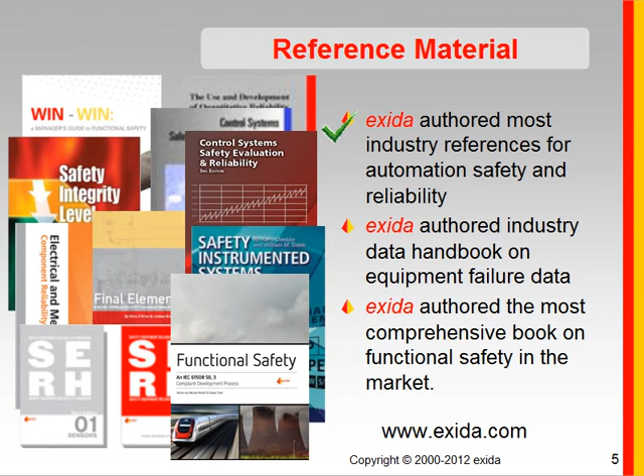At Exida, our procedures, our methods, and our data are all published in publicly available books. We supply these books to our customers, to our competitors, and to anyone who wants them, because everything we do we try to make public. I'm pleased to say Exida has authored most of the industry references ever published on automation, safety, and reliability.

The primary objective in IEC 61508 certification is a demonstration of high design quality, both for hardware, software, mechanical, and high manufacturing quality. Now, when you think about it, it's a whole lot different than ISO 9001, because in all my experience with ISO 9001, you primarily focus on the manufacturing, procurement, and delivery process. 61508 is very focused on the design process, and we spend a lot of time focusing on how well a product is designed.

Why? We want to make sure we have sufficient protection against latent design flaws that could have a very significant impact on safety and availability.

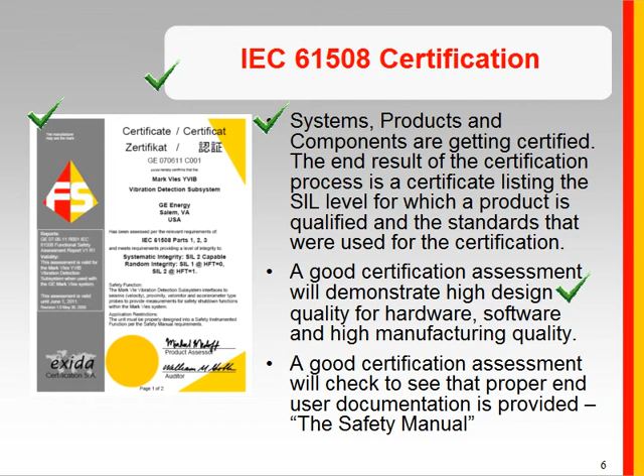There are several companies in the world that have been accredited to provide IEC 61508 type product certification. All product certification programs are typically run under a set of two standards, ISO IEC 17025 for a test laboratory, and EN 45011, which is IEC Guide 65, for the requirements for running a product certification program.

Every country in the world, typically, well, most every country in the world, has an appointed accreditation body. Most accreditation bodies are members of the International Federation of Accreditation Bodies, and as such, they compare notes on how this is done. Most accreditation bodies are governmental agencies.

In the United States, the accreditation body for functional safety is ANSI, the American National Standards Institute. ANSI and the American Society of Quality have formed a merger and provide accreditation per IEC 17025 for test bodies. Now, and the bottom line is, any company who wants to be a CB, a certification body, in the United States must be accredited by ANSI in order to do 61508 functional safety certification.

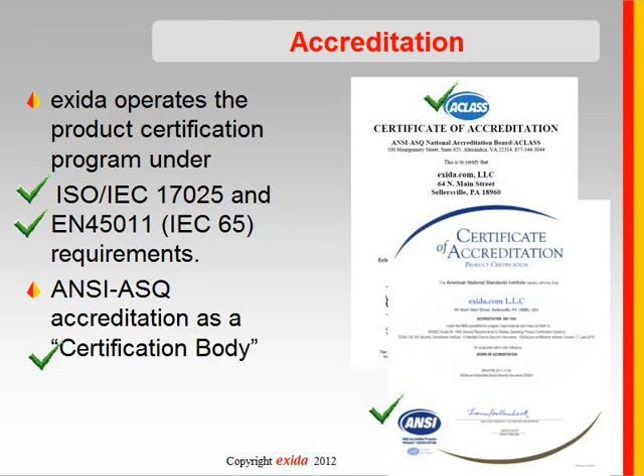Exida has been accredited by ANSI and ACLASS for this kind of work. Now, in fact, Exida strives to operate the most relevant and useful product certification program in the world. And I mean relevant and useful to those who purchase the products that are certified.

In the process industries, Exida does this by having a group of engineers out in the field working on real projects all the time. And the second thing we do is we have established an advisory board. It's a group of approximately 15 end users from around the world. And they review the Exida certification scheme and all the requirements and make suggestions and help us with interpretations and deal with any complaints against the Exida certification program.

It's a very valuable group because over the years they have expressed serious concerns with existing certification programs and have told us that if we ever expect to succeed as a certification body, we need to do a better job. So we listen. Exida has created a functional safety and cybersecurity product certification scheme.

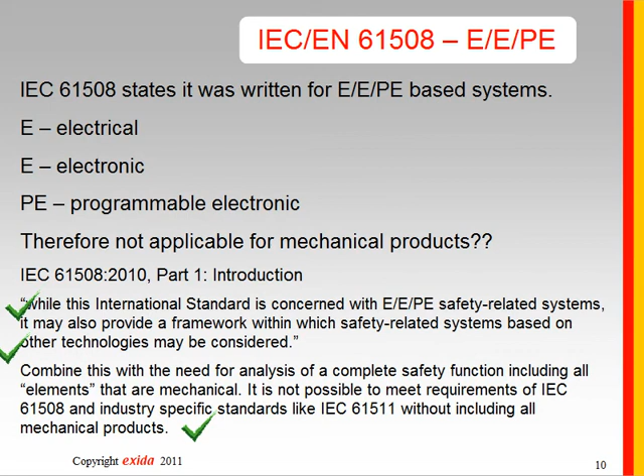So in order to help people do this, Exida does a lot of certifications on all of these kinds of products, including mechanical. For example, a pressure transmitter. How many people even know you could buy a certified pressure transmitter? Well, quite frankly, in the mid-90s, you could not. But today, Yokogawa, Rosemount, and probably a half dozen other manufacturers have been given a SIL 3 capability rating by Exida.

In order to do that, they had to establish or make sure their existing development process meets all the SIL 3 requirements. Why is that? We want protection against systematic failures. They had to add features to the product to ensure protection of the data. Typically, many of them added features to detect CPU execution problems to meet specific requirements of 61508, and all of these things are meant to protect against design mistakes, particularly design mistakes in the software. As an ex-software developer, I tend to choke on that because it's hard sometimes to deal with all these process requirements.

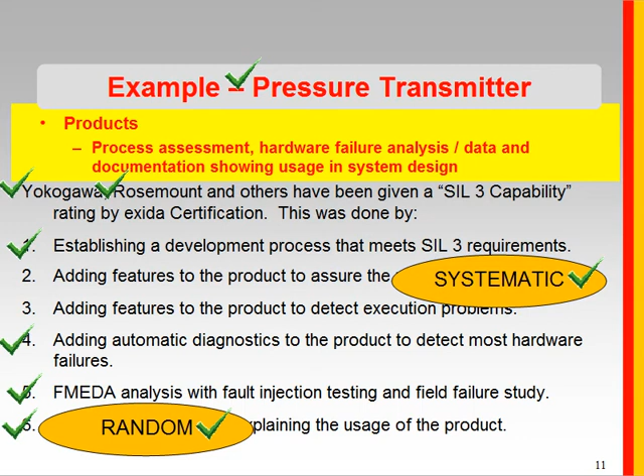Solenoid valves are certified. ASCO, Bifold, Versa, and many other manufacturers have been given a SIL 3 capability rating by Exida certification, and they had to establish a hardware development process that meets SIL 3. Of course, there's not nearly as many requirements if they don't have any software. Demonstrating test results that prove they are following the process. They created a specific user's manual explaining the usage of the product, and FMEDA analysis was done on their particular product design, backed up by a fault injection test and a field failure study to give very accurate failure mode and failure rate data for end users.

Any questions so far? Don't hesitate to ask. Oh, here's one coming in: what does SIL 3 capability mean? All right, that's a good question.

The term systematic capability was defined in the 2010 version of 61508. That term was not in the original first edition. The term systematic capability means that the design, development, test, and documentation processes meet the requirements of a given SIL level. So SIL 3 capability means the design, the development, the documentation, the archive, the review processes meet the SIL 3 requirements of 61508. And SIL 3 capability, as the original term systematic capability means, a product is sufficiently free of design defects to be used in a SIL 3 application. Again, I'll repeat, this is a rather new term defined in the 2010 version of the standard. It is a good question.

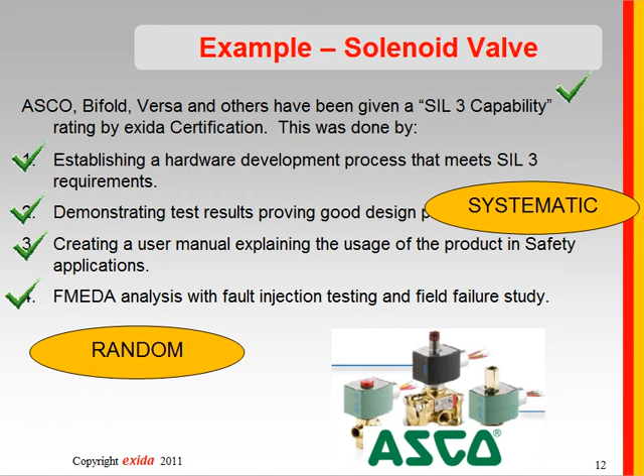Thank you. Again, we want to protect against systematic and random failures.

Even actuators and valves, for example Fisher Controls and many others, have been given a SIL 3 capability rating by establishing a proper development process for that hardware, demonstrating test results, proving they follow the process, doing an FMEDA analysis with fault injection testing and a field failure study, and creating sufficient user documentation to explain the usage of the product.

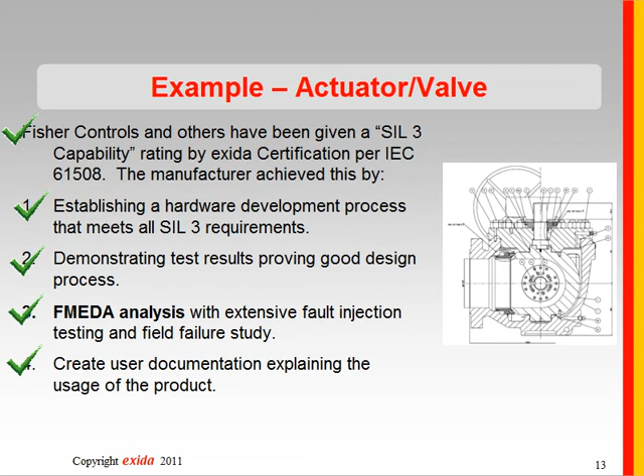Covering both systematic and random failures. Now today, if any of you have not checked, there's a large number of products of many different types that have been 61508 certified. The primary reason for that is that end users must justify all equipment used in safety instrumented function designs, and 61511 gives them two ways to do that. They can do their own prior use justification, or for safety integrity, they can buy products that are 61508 certified. Many end users are going in that direction because they don't want to do the work to do a prior use justification, and they don't want to take any responsibility by signing any prior use justifications.

It's amazing the different kinds of sensors that you can get today. Main primary process sensors: pressure, temperature, flow, level, gas detectors, flame detectors, BMS flame detectors, vacuum. All kinds of products are now available today.

Of course, PLCs, that was the original certification concept. But today I can even get trip amps, isolation modules, intrinsic safety barriers that are all 61508 certified. And certainly on the mechanical end, I can get actuators, solenoid valves, quick exhaust valves, and all kinds of process valves - ball, gate, wedge, butterfly - many different technologies are available in a nice assortment of 61508 certified products. You can take a look at one list, the Safety Automation Equipment list on the exida website.

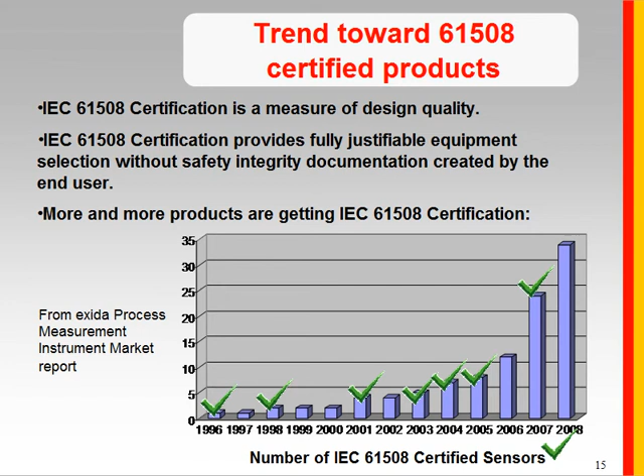If you go to the safety automation equipment list and look at pressure transmitters, you'll see an updated version of this slide, where you can see there were 4 different manufacturers, 5 different products that have been 61508 certified. I can see this slide is a little dated - nice though, today I think there's more like a dozen. I haven't looked for a few weeks.

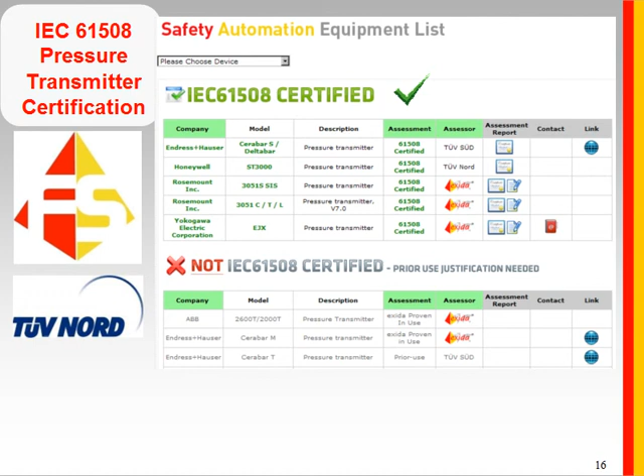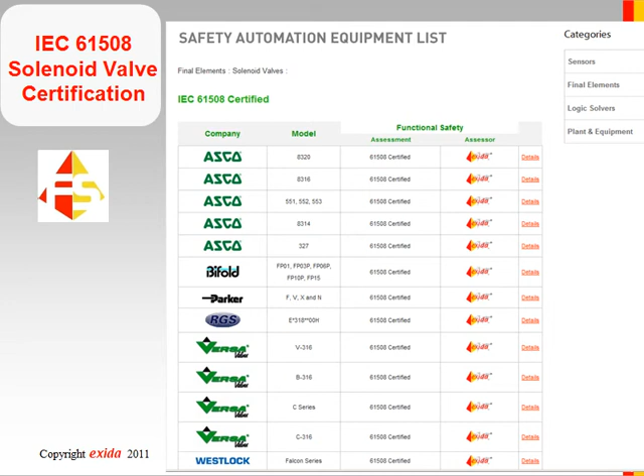You might look at the solenoid valve list and you'll see many different manufacturers, literally over a dozen different choices of families of solenoid valves that have been 61508 safety certified. Same thing for other mechanical products and PLCs. If you look at the PLC list for logic solvers, you'll see not only the functional safety certifications, but the cybersecurity certifications that have been finished as well.

Now, what does this mean for product development? I spent a lot of time talking about the design process and the need for high design quality. The essential requirements are: any product or any group that develops a product - hardware, software, mechanical - needs a documented process for their work. We call it a life cycle, but it just means what are the development procedures and the development processes.

You must have a requirements document. You must have a validation plan where you test in a fully traceable manner that every requirement has been implemented. And you certainly need design documentation, starting with a defined architecture - typically a set of boxes with interactions. Of course, you have to have good design documentation so that people who make changes can make those changes without messing up the safety. You need a qualified set of tools, especially any language compilers.

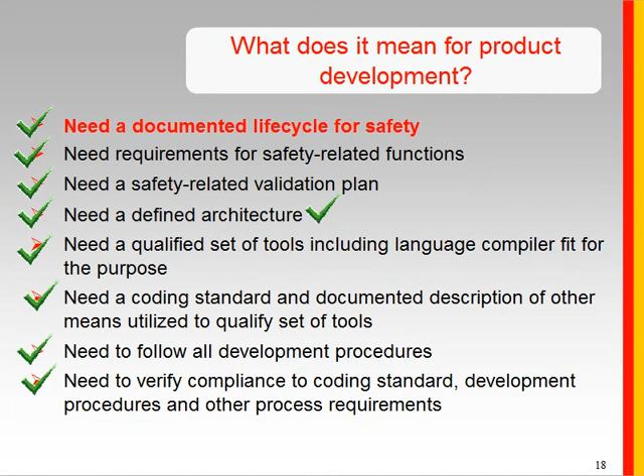In the world of 61508, you need to verify compliance to the coding standard, to your development procedures, and all process requirements.

Now what does this look like? The bottom line is if I categorize all the requirements, there are 5 main categories. For your hardware, you have to have relatively low failure rates and possibly a fail-safe design, or really good automatic diagnostics if you have a smart microprocessor-based product. If you have those things, you'll probably meet the safe failure fraction requirement, which you must do to get a particular SIL rating.

Number 3, and you can see I have that in red and bold, because it's one of the hardest things to do. A lot of people have very good hardware and electronic and mechanical design processes in place, with very good tools and lots of experience. But the same thing doesn't always apply to the software engineering world. There, a lot of people are still doing things in a less than high quality manner. That doesn't work in IEC 61508. All that stuff will fail.

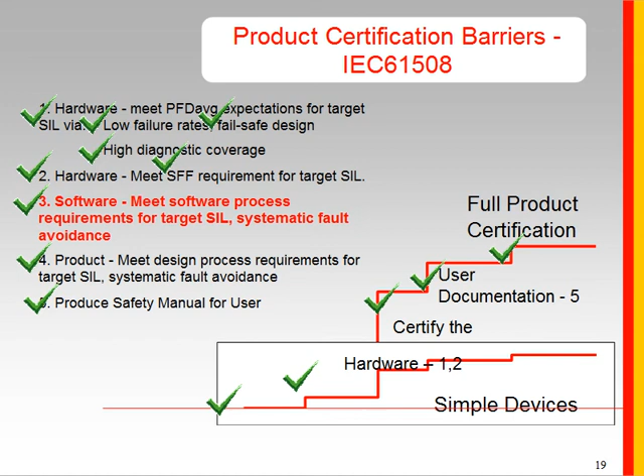The exida assessment and certification scheme—we call it an open scheme because we make the assessment products, process, and requirements publicly available. We have them written up, they're on our website, and we present them in web seminars just like this one.

We require that the assessment report and the certificate be publicly available, and that they be published on the exida.com website, specifically on the safety automation equipment list. For any of the products on the list certified by exida, you can get a copy of their certificate and assessment report. Some manufacturers don't like that, and most other certification bodies do not require it. But at exida, we feel this is an important part of an open certification process.

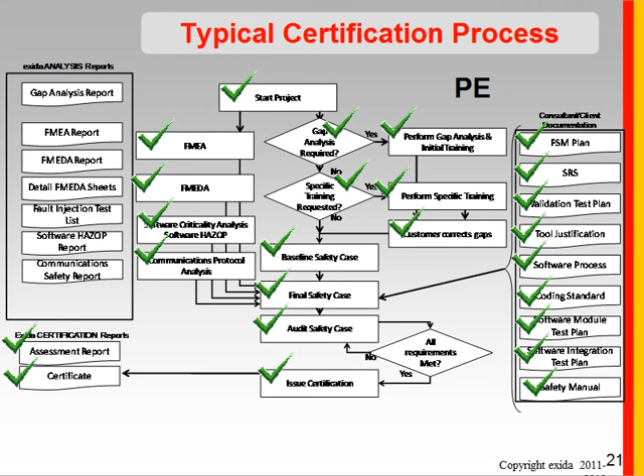The big problem in the software world is a whole lot of people don't even know how to do this. They've never even thought of applying the FMEA technique to software. But it is effective and it does work, and we typically do this as part of the exida certification scheme. In some cases, our customers do it, and we simply audit the results. That's a good question. Thank you.

Obviously, for those of you who are product managers for a simpler product, like a simple electric, electronic, or mechanical device without software, there's a lot of steps and a lot of documentation that's just not relevant. That's obviously why the barriers are much simpler. But nevertheless, there's also a lot of real meat in a 61508 certification for a simple mechanical component.

An FMEA is sometimes done for a complex design, but most of the time it's for a simple device, we skip it. An FMEDA is done, and accurate failure rates and failure modes are determined.

An FMEDA provides information with a lot more resolution than you'll typically get from any field failure collection system, and a lot more accurate. FMEDA reports are written even for simple mechanical parts. Fault injection tests are done. There's still a safety requirements specification, still validation test plans, still tool justification required, a safety manual and an FSM plan. The safety case ends up being a lot simpler, but there's still a full-blown audit. And when they pass, we still issue an assessment report and a certificate. So many of the things are the same, it's just a lot easier when there's no software.

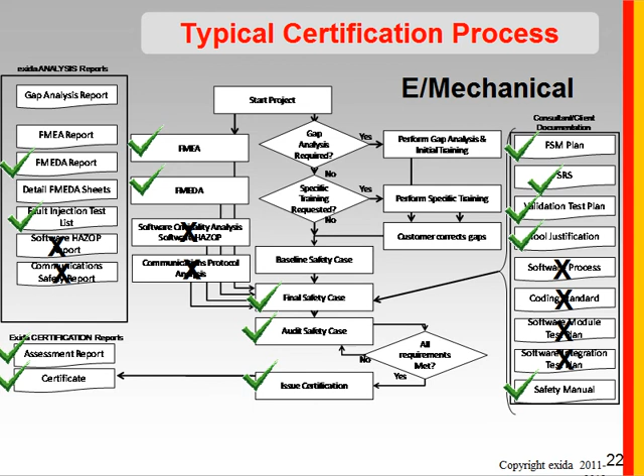We talked a lot about FMEDA, and for those who want to dig in a little more, we just did a web seminar 2 days ago. All of those exida web seminars are recorded and available online. So if you want to see lots of details about an FMEDA, what is it, how it works, please go listen to that recorded web seminar from a couple days ago.

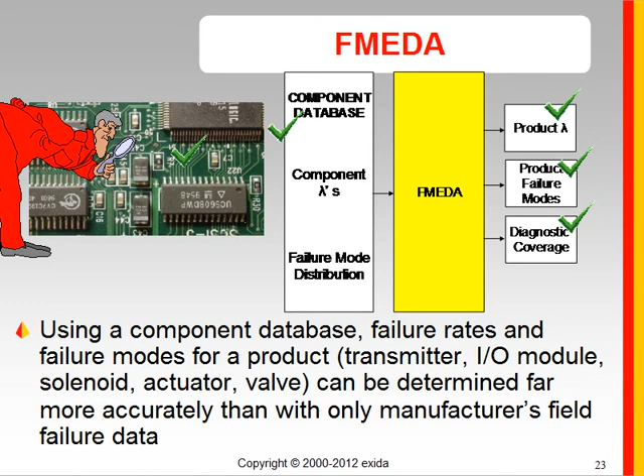But it's a concept of using a component database and looking at every single part, one part at a time. Now, that might seem unbelievably tedious and boring even, and I'll admit I felt that way. But it's very detailed and very systematic, and it gives you great insight, and it gives you a product failure rate based on the design parameters. More importantly, it identifies significant ways of improving a design. It identifies all the product failure modes relatively accurately, and any diagnostic coverage measurements, quantitative measurement of diagnostic coverage, which is very important if you're using a smart device with any automatic diagnostics.

You've got to understand, how good are these diagnostics? The FMEDA is very much based on an electrical and mechanical component database, and the exida electrical mechanical component database is based on over 20 billion hours of field failure history.

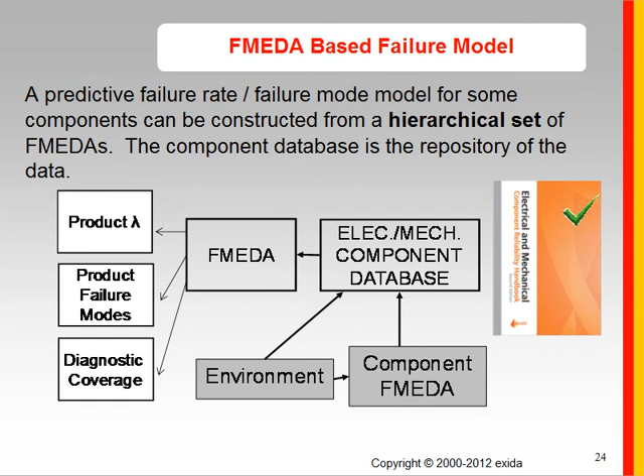Another way to get failure rate data for a particular product, at least a total failure rate, is to do a cycle test. The cycle testing method is valid, but the hidden assumption in cycle testing is that a product is actually used in an environment where it's constantly moving. Because the hidden assumption is that random failures during useful life are due to premature wear out. At the end of the day, cycle testing is designed to determine when a mechanical part wears out.

That was all developed to determine that particular number. Now, there is a way of estimating random failure rate during useful life when the failures are due primarily to premature wear out, and you can obtain a total failure rate based on the cycle test. There are certifications on the market which are based on cycle testing, and you can usually tell by looking at them because they often have the assumed demands per year. In this particular example, the analyst assumed a minimum of 10 demands per year, so the results are allegedly valid for any application where the product moves at least 10 times per year.

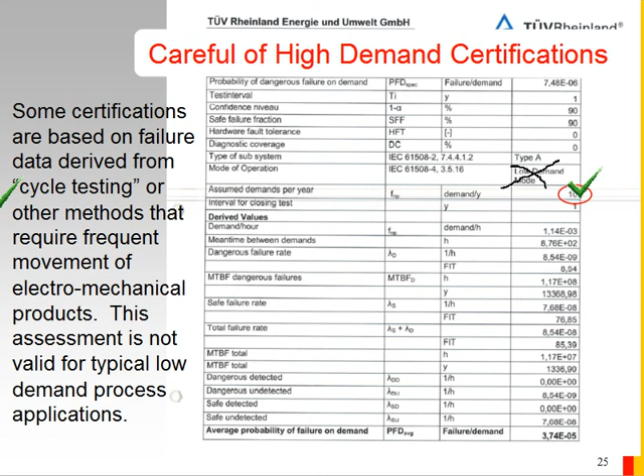I will say that when I looked at this, I was a little misled by the term low demand mode, because in fact 10 cycles per year is not low demand at all. But let's ignore that for now. Exida will do, and our scheme allows us to do, cycle testing, but we will not scale those results for any cycle period more than 1 week, because all of our research shows that you need at least 50 demands per year before failure rates due to stiction, cold welding, corrosion and so forth occur. The Exida certification scheme will use cycle testing when it's appropriate, but we will clearly identify that it's for high demand only.

The Exida certification scheme uses a safety case where all the safety requirements are listed. For every safety requirement, we make an argument based on the actual design, and for every argument, there must be evidence showing that the argument is valid. An independent auditor will evaluate the safety case, and the result of that is an assessment and a certification, if the independent auditor agrees with every argument and finds the evidence to be satisfactory. A lot of certification bodies do not use the safety case because, as you might imagine, it's quite tedious, detailed, time-consuming. But it's a matter of completeness, a matter of doing a thorough job, which we feel is very important.

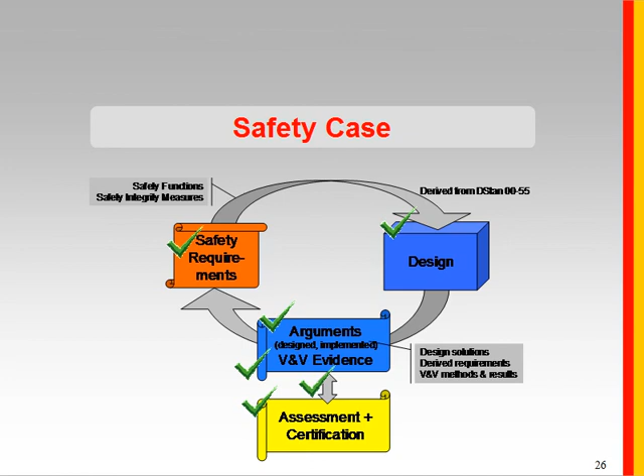Perhaps even more important than accreditation is competency. I think functional safety is a tough subject, and the IEC 61508 standard is quite complex and hard to understand. I will admit that many of us debate the exact interpretation of some of the sentences.

We spend a lot of time thoroughly understanding how this standard applies. I'm proud that Exida has probably as much or more functional safety certification experience than any other company in the world, if I include our people's experience when they were part of another company. If you look at Exida certificates, you will sometimes see that the people who used to do certifications for one of the TUV companies are now doing certifications for Exida. Exida has many former TUV engineers on staff.

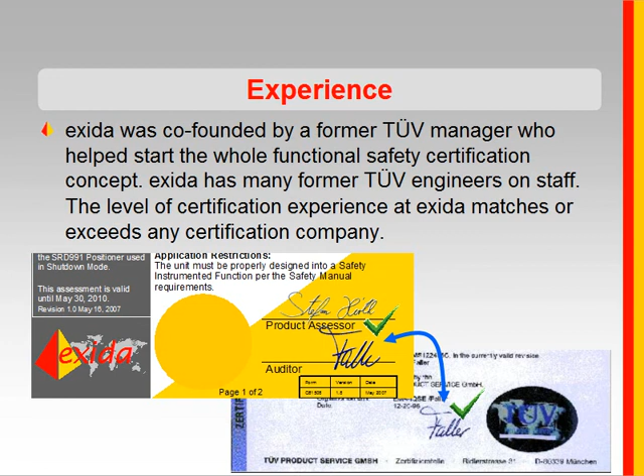Perhaps even more important than experience is technical excellence, and we like to emphasize that very much. Exida has been very active on the functional safety and cybersecurity standards committees. I believe we have more functional safety standards committee experience than any other certification company. Many of the people at Exida have developed the 61508 analysis techniques. And of course, at Exida, we publish these techniques, we publish our data, and we will absolutely continue to train even our competitors in how to use our tools and techniques.

In the process industries, I do see that this slide's a little out of date, but we estimate Exida has done about 75% of all the certifications completed. Now, we were ignoring cycle test certifications that indicate low demand or that haven't followed accepted practices from the reliability engineering community. But we're quite proud of the fact that Exida has done a substantial quantity of process industry certifications. And of course, I think the list would look much better if we brought it up to date.

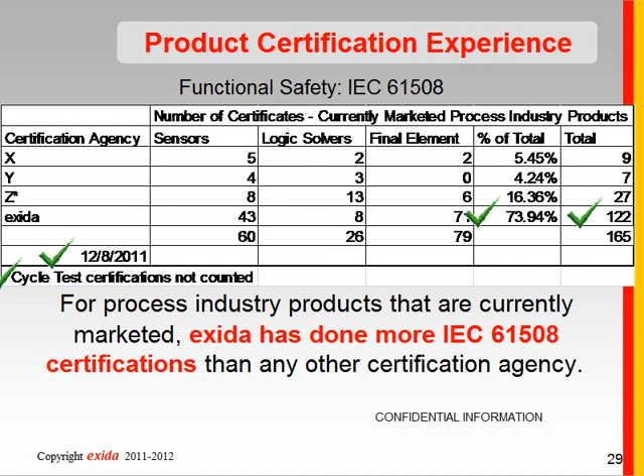If you're interested in any more information, we have the Open Certification White Paper and a pretty good, up-to-date paper on IEC 61508 Frequently Asked Questions. Both of these are available for free download on the Exida Resources area of the Exida webpage.

I also wanted to point out that Exida does publish a book called Functional Safety, an IEC 61508 SIL 3 compliant development process. Now, this shows an example 61508 development process in language that means something to development engineers and software engineers, not the language used in the standard.

Anybody know what a bespoke system is? Yeah, I didn't either for a long time. Anyway, to me, this book was published to give away all the secrets of successfully getting a 61508 certification. So if you are getting a 61508 certification and you can't make heads or tails of the actual standard, and you have no idea what you have to do, you can get training from Exida, of course, or you can spend just a little bit of money and get one of our books. It's available on Amazon.com or the Exida.com website.